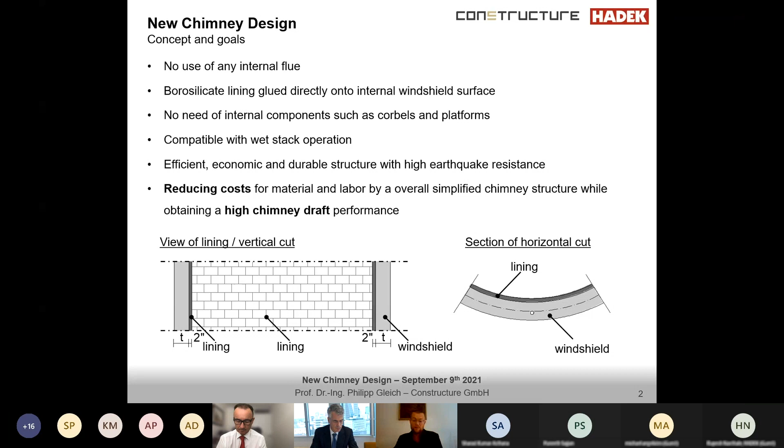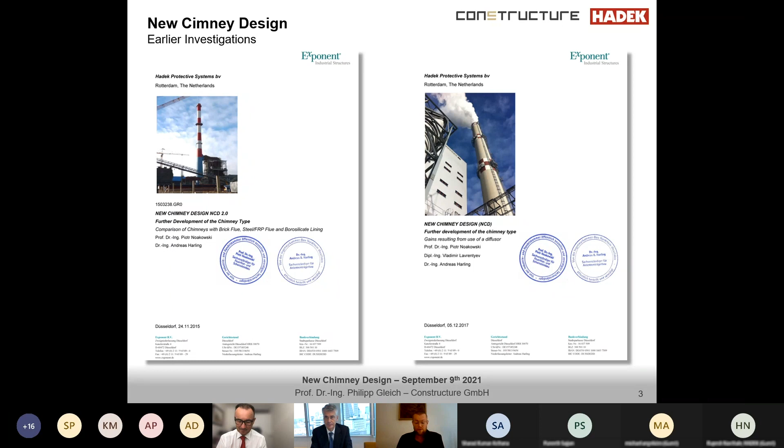I want to present some studies we have been undertaking at Constructure, which was formerly entitled Exponent. Those studies are helpful to understand the benefits of NCD better, I hope. You can also receive those studies, which I will be presenting later, from HADEK or from Constructure on request if you want. As part of one study, we compared several concrete chimney designs, such as the classical brick flue, which is a little bit outdated because it's not wet stack compatible, and the type 2, the steel FRP flue, and the new chimney design. Due to the limited time, I will just be talking about steel FRP flues compared to the new chimney design.

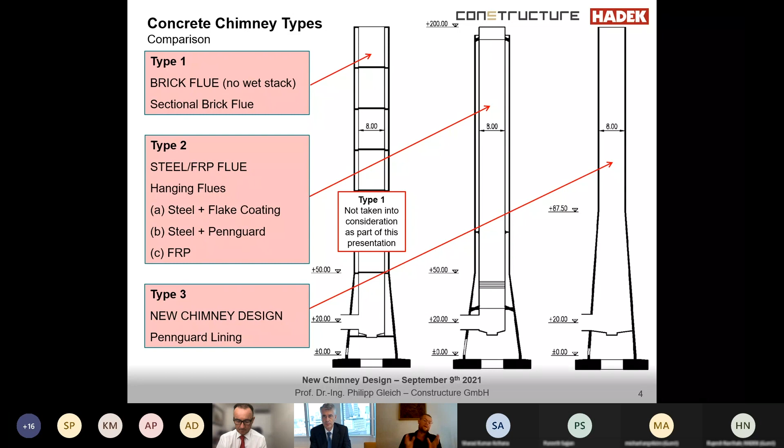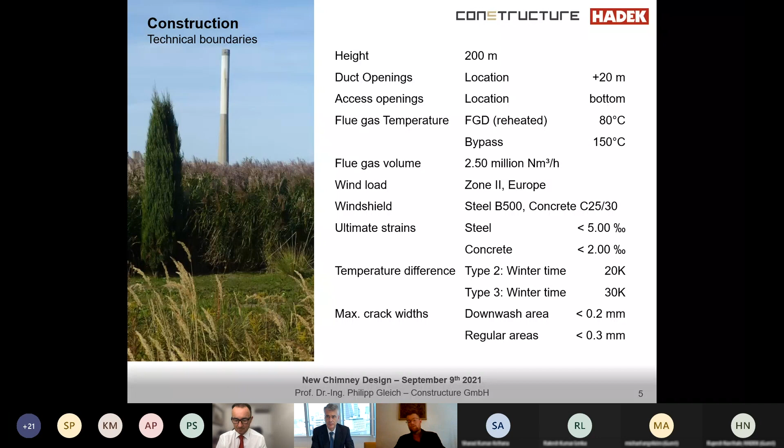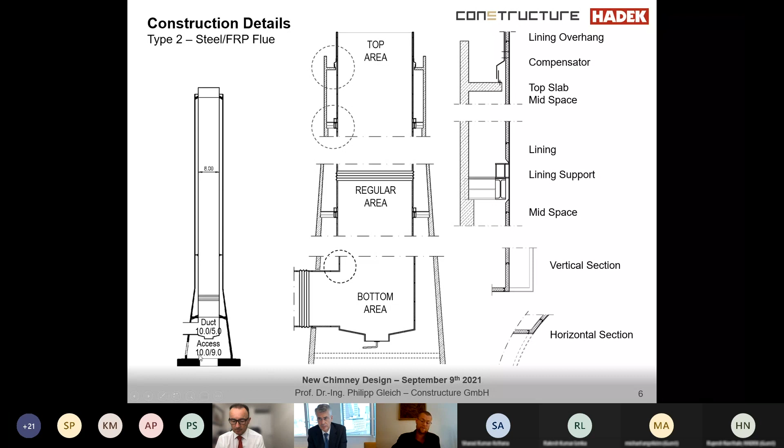Here on this sheet, you just see some important construction details of the chimney type 2, the steel FRP flue. So you have all those internal components, such as the lining support, the lining, which is like glued or whatever to the flue itself. You have the compensators, and all those internal parts, of course, are quite costly to install, and you need quite a big effort to bring in the flues into the chimney. And you can arrange that only by that very large access opening at the very bottom of the chimney. So you need a very large access opening, therefore you have a very large, wide chimney at the bottom.

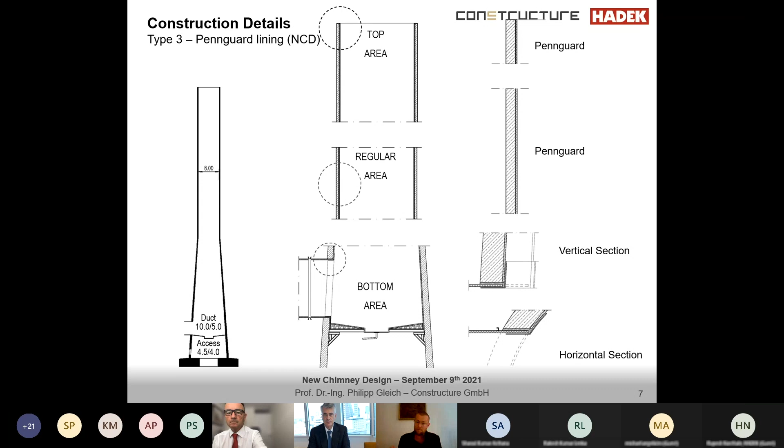But the problem is that you get the temperature much closer to the windshield, and therefore you need to be very careful when it comes to a proper design.

I don't want to bother you too long with theoretical stuff, but let me show 2 or 3 sheets regarding the way we are working, considering the nonlinear behavior of concrete, the cracking and material properties, and also the deformations when it comes to the vertical load-bearing behavior.

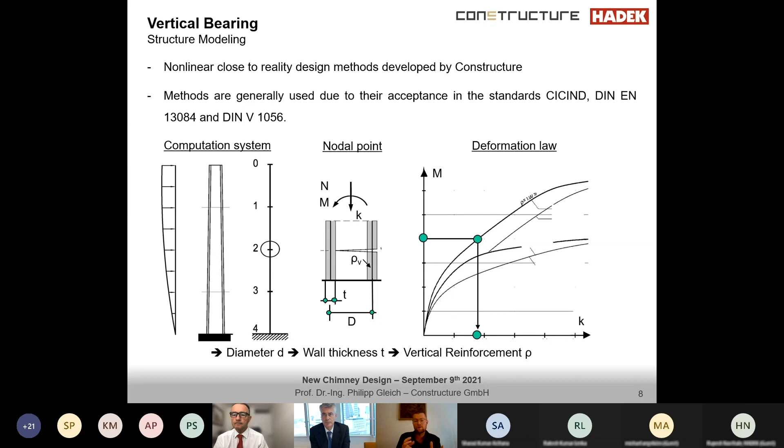To achieve that, this is the way we do it. We have our own system and programs we produce, comparing the actions to the reactions in an iterative process, which is very handy to understand.

As a result, you get the strains in the steel and the strains in the concrete, and you can compare these strains to the limit strains you applied, like 2 per mil for the concrete, 5 per mil for the reinforcement. If there are too high strains, you need to start the process again, make the diameter a little bigger, add some reinforcement, whatsoever.

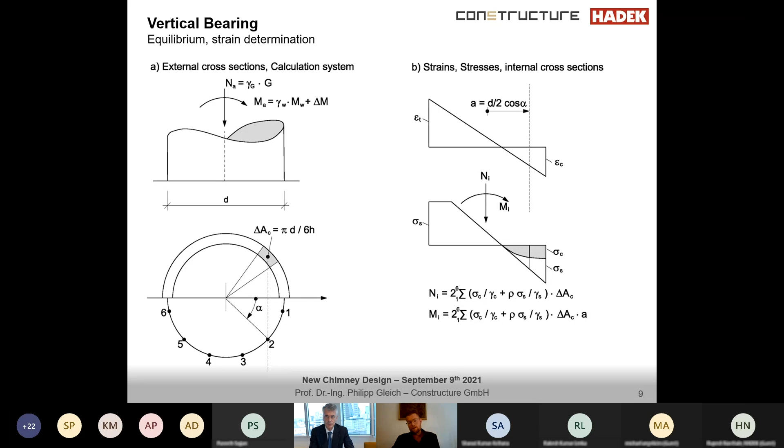From the strains you obtain, you get the curvature, the rotation, the deflection, and last but not least, the second order moment, which you apply again to the moment, and then you start all over again.

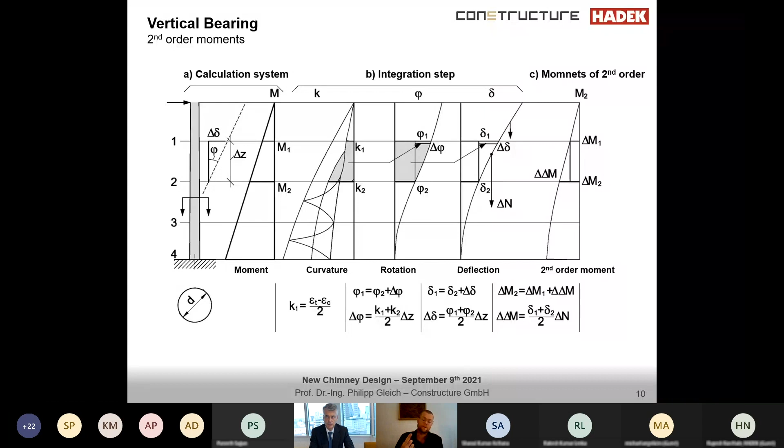So this is the way we are designing the chimneys. Just to present some results of the steel FRP flue, and the next sheet would be the regular Pennguard lining chimney. You see in this case you have a quite big chimney.

You need a large chimney because we have a flue of 8 meters, so we need a lot of space for the chimney itself. Therefore you have a quite wide construction, which is only partly used - the utilization is quite high from the middle of the chimney rising, but the very top half of the chimney is more or less very unused when it comes to the strains of the material.

Due to the large opening, we need to reinforce the flue parts, and we get a very high reinforcement concentration in this area. So you need to design this area very carefully, and nevertheless, it's a very low utilization of the material.

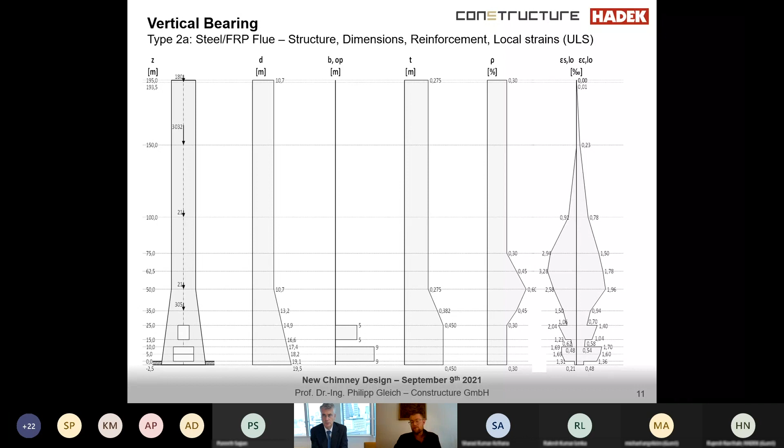Comparing this type 2 chimney to the type 3 chimney, the NCD chimney, you see you get a much more slender structure, a smaller diameter, a wind shell which will increase a little bit in certain areas, and we add some reinforcement where we need it, getting a system which is quite well utilized - a more economic structure, you can say.

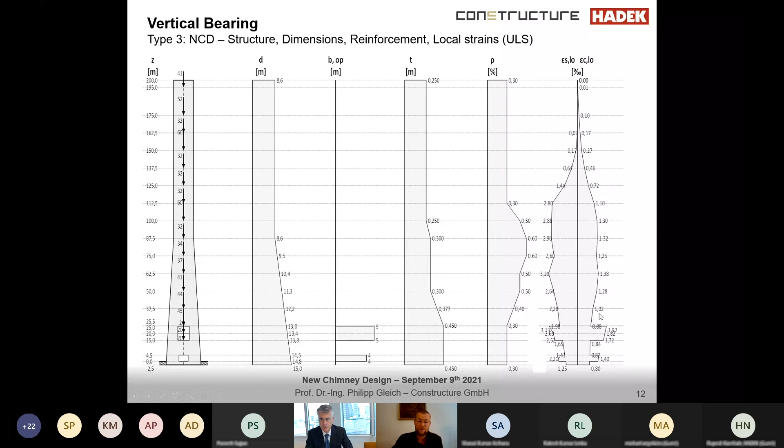Also in the bottom area, you need to do a proper design. You have lots of reinforcement in that area, additional reinforcement next to the opening, so this area needs to be designed very carefully.

Now you see the comparison of both structures. The NCD is obviously proven to need less concrete. If you consider we need, let's say, 1,900 cubic meters of concrete for the type 3, you would need approximately 20% more for the type 2 chimney.

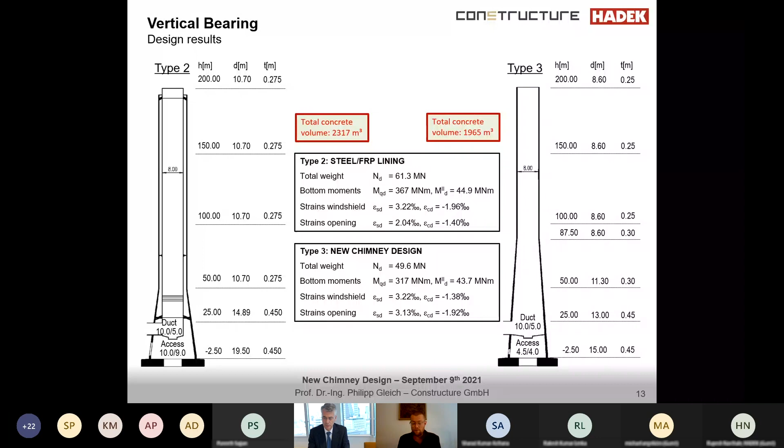So the chimney without an additional steel or FRP flue gives us a quite lightweight structure, which might be very helpful when it comes to earthquake design, but it might be a bit problematic when it comes to the design of the foundation, because you need to prevent the chimney from falling over, and also the deflection, because you have a more slender structure.

But it's not only the vertical reinforcement which is very important for the design process, but also the horizontal reinforcement. I would say that crack calculation is definitely the major problem of all concrete structures here in Germany, and maybe the biggest problem of all concrete structures in the world.

You need to do a realistic estimation of the loadings in order to get a realistic estimation of your crack width. If you're not able to estimate your loadings correctly, you might not only get durability problems, but you might also get serious safety problems regarding the structural integrity of the chimney.

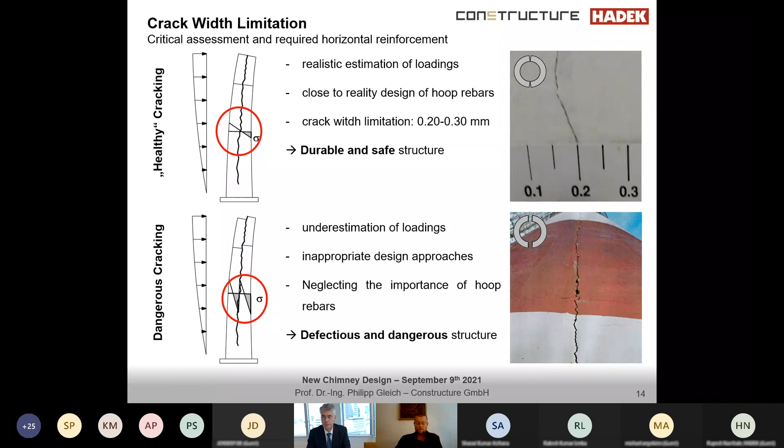So how are we designing the horizontal reinforcement? Again, we are considering the nonlinear behavior of concrete, so the cracking is taken into account close to reality, and from that we achieve quite economical results. If you're just doing a linear calculation, it will lead to either too much or not enough reinforcement, which might or will lead to durability problems or safety problems again.

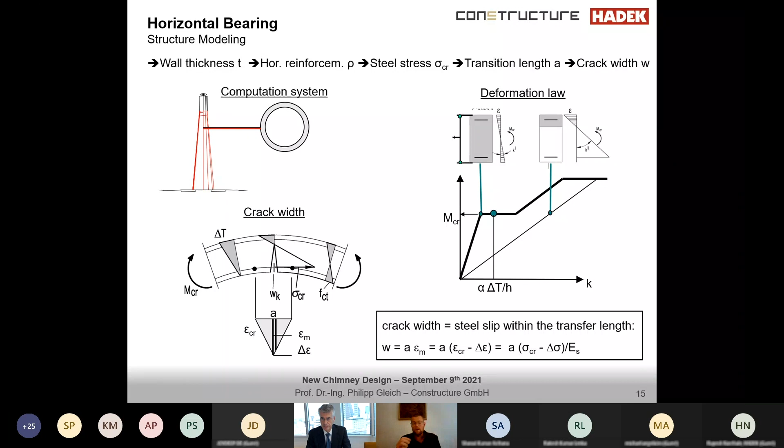Regarding the new chimney design, the most interesting aspect is to estimate the temperature in the concrete close to reality, because this is your main action.

In the following two sheets, I'm presenting some design results regarding the horizontal design. You see the structure to the left, the wall thickness, the reinforcement ratio, the steel stresses, and the crack width.

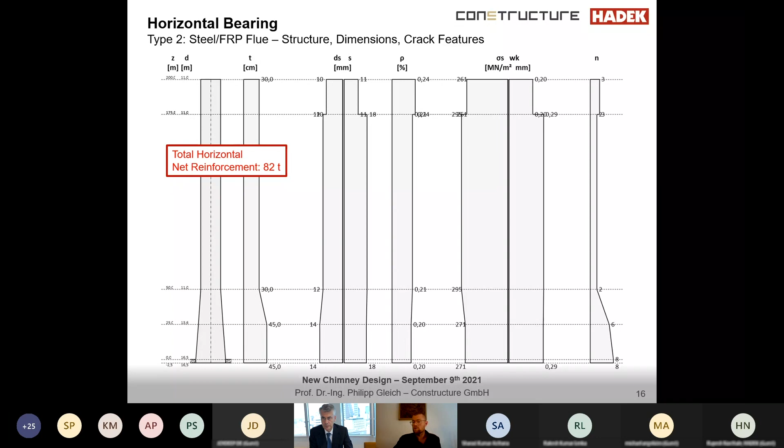We have limited the crack width in the top area due to the downwash effect. We don't want any large cracks there, but we allowed somewhat larger cracks up to 0.3 millimeters going down from the downwash area. You can see it's easily possible to find a proper design if you use the proper design approaches.

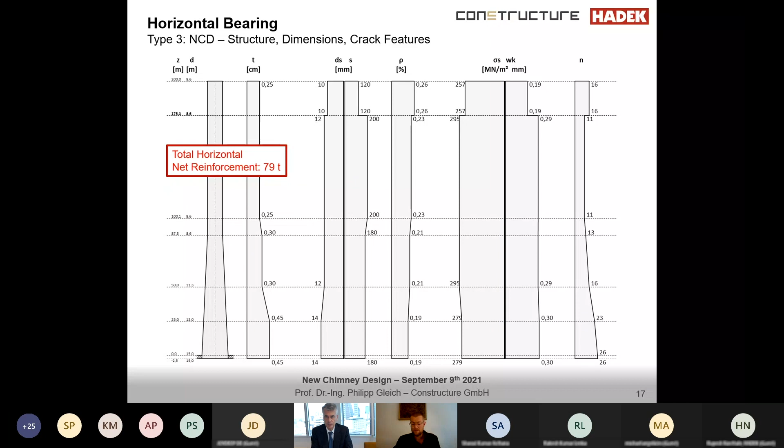When you look at the steel strains, you need to consider that temperature is your main impact. If you're not taking into account the full nonlinear behavior of concrete, you will get false constructions and design results. As I said before, the NCD is quite a lightweight structure.

As a result, we need a heavy foundation to keep it from falling over, basically. Of course, it's not needed at the type 2 steel FRP flues. We have a very large chimney at the very bottom due to the necessity of a large opening for those flue parts.

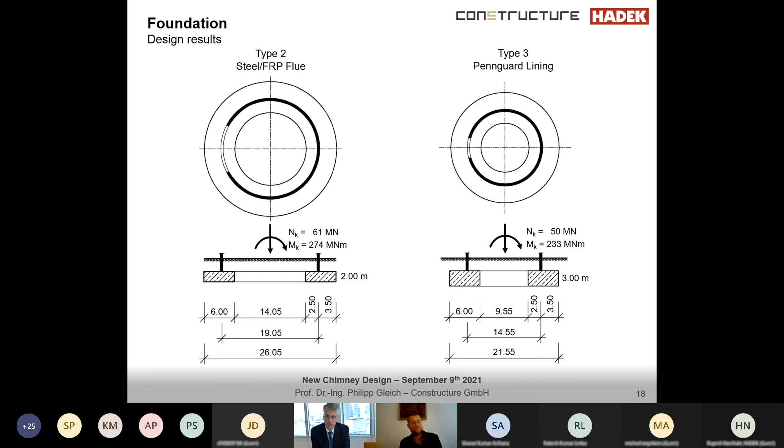But those foundations of the NCD design in general are a little smaller compared to the steel FRP flues, which is very helpful if you have only limited space. So where a steel FRP chimney might not fit in, you might have a chance with an NCD chimney.

Apart from these structural design aspects, I want to show you some more studies we had undertaken. So I will leave those two chimney comparisons behind, and we will talk a little bit more about the draft performance of chimneys.

We were asked once to compare two chimney types. Type A is an NCD chimney, 110 meters high, reasonable diameter of 7.7 meters, with a thickness of 45 centimeters at the bottom and 30 centimeters at the top. We needed to compare this type A to another type B, which was a little higher, 120 meters, 8 meter diameter at the top, and as it is a conical design, a diameter of 14 meters at the bottom.

We were analyzing the flue gas pressure and flue gas velocity. By the way, it was not me - I'm rather a concrete guy, but colleagues of mine are very familiar with flue gas estimations and calculations.

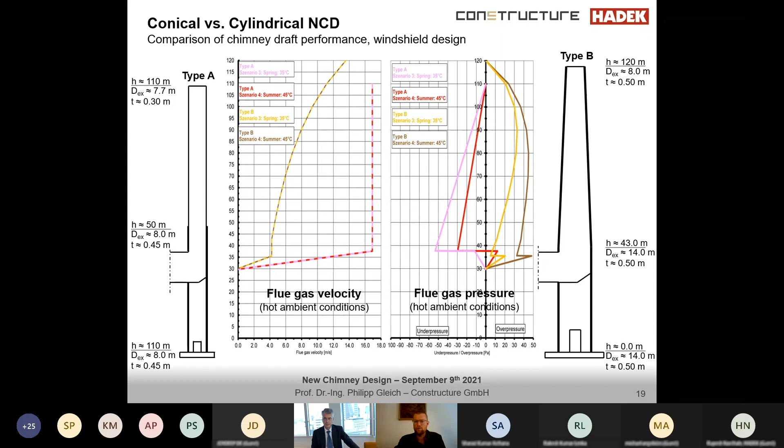We estimated the flue gas pressure, and it was interesting to see that the type B chimney has a very huge overpressure at almost every elevation in hot summer and spring time, and it was basically the same in winter compared to the NCD chimney. Those lines, red and pink, show that you get at almost every elevation a significant underpressure. So the conical design has a very poor performance compared to the cylindrical windshield design in this case.

And it was not only the performance which was poor - if you have such a poor performance, you always need more electricity for an extra booster fan. We had in the type A chimney a much lower concrete consumption, a much easier consistent reinforcement arrangement, and a very simple windshield construction.

It is much easier to erect a cylindrical windshield like type A compared to type B, and you generally get a very good concrete surface quality building a chimney type A. Of course, type A needs high reinforcement ratios at the bottom, but nevertheless the gains from type A compared to type B are always dominating.

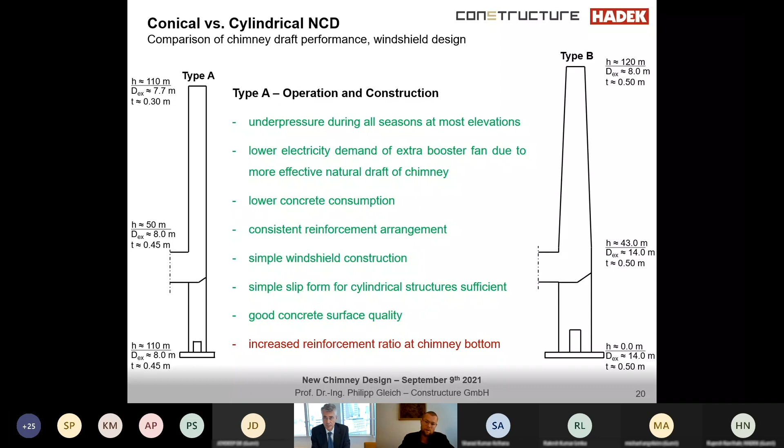We always try to build a cylindrical windshield, at least in the area where the flues are. You see here to the left, a chimney 95 meters high, a little more than 5 meters in diameter. This chimney had been built in Chile, and you will get more information about this chimney in two weeks, I guess.

You see it is a very slender design. It has a wall thickness of 22.5 centimeters at the top, rising up to 35 centimeters at the bottom, but it's a cylindrical, simple design. You can also arrange a cylindrical design up to 120, 140 meters without any problems.

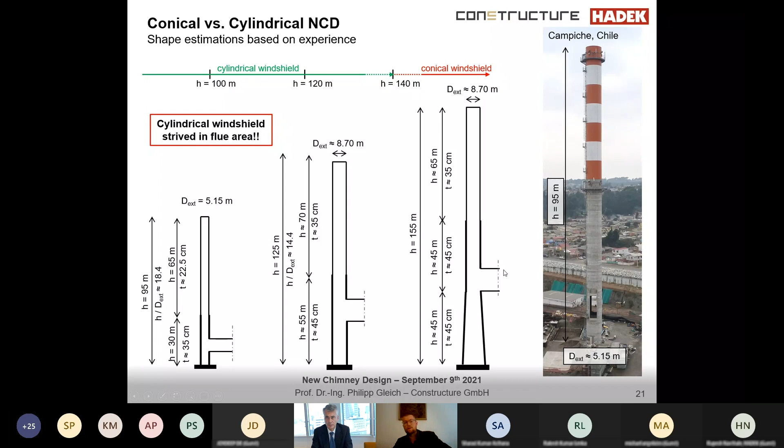If you are exceeding maybe 140, 150 meters high for the chimney, you will start to build a rather conical chimney. But we try to build the conical part only below the duct entrance. In that case, we don't have a pressure loss in the flue gases, since we have a cylindrical design from the duct opening upwards. This is very important from my point of view, to keep a very straight and cylindrical design from the point of entry of the duct.

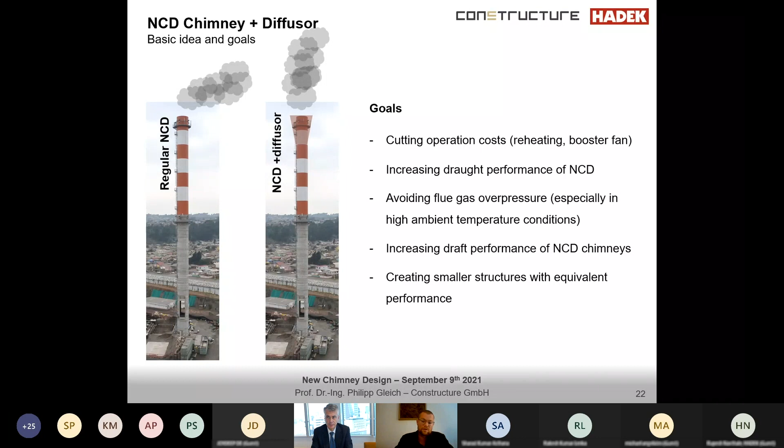Me and my colleagues did studies regarding an additional diffuser which might be applied to an NCD chimney. Like a diffuser, it's very common on steel chimneys, but it's not common on concrete chimneys. The idea was to cut operation costs, increase performance, and avoid overpressure, especially in ambient conditions with high temperatures. It will increase the overall performance of an NCD chimney.

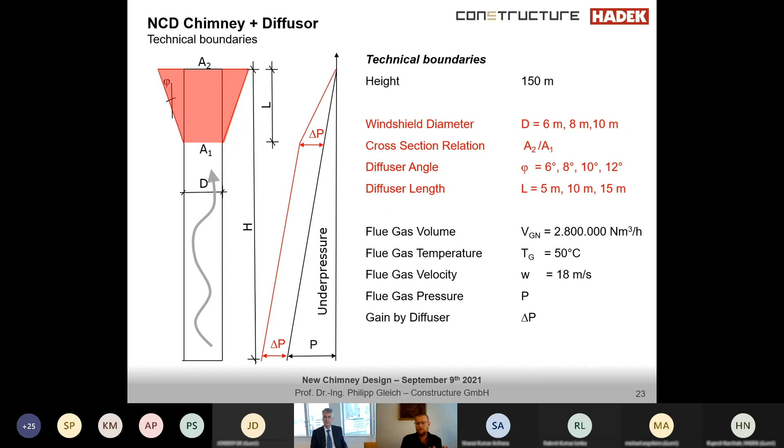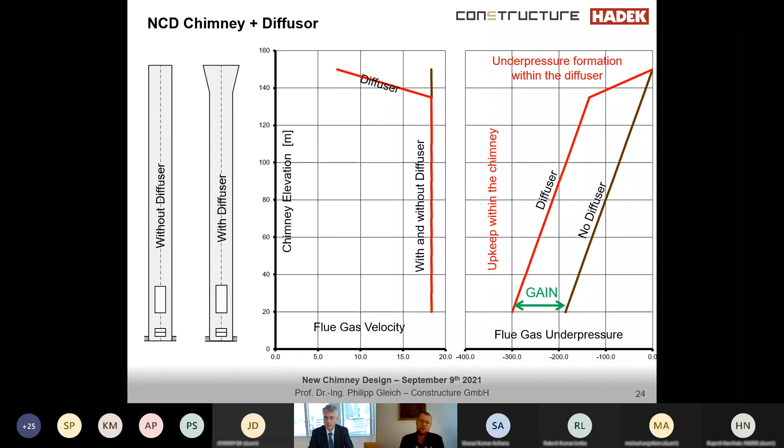Therefore we did some analysis. We were analyzing the effect of the windshield diameter, the diffuser angle, and diffuser length on the gain you can obtain from the diffuser. Those results are very promising. If you have, let's say, two chimneys, one without a diffuser and one with a diffuser, you get a strong gain from the diffuser, always depending on its very shape. This study proved that adding a diffuser to the top of a chimney might be a very interesting, good measure to increase the performance of the chimney.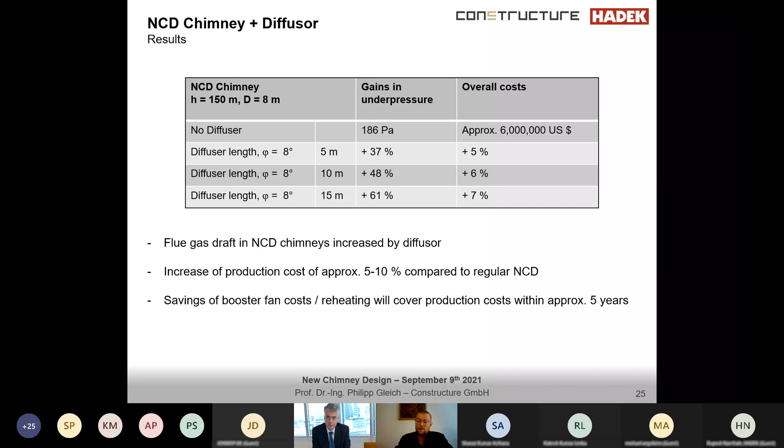If you increase the performance of the chimney, you will of course save electricity for your booster fans. We analyzed that the production cost of a regular chimney would be approximately 6 million US for a chimney 150 meters high with a diameter of 8 meters. Calculating the extra effort to build a diffuser on the very top, it is between 5 and 10% compared to the overall cost of the chimney. The savings from booster fan costs due to the better performance of the chimney will cover the production costs within approximately 5 years.

It is always quite tricky to design NCD chimneys. If you are considering a regular steel FRP flue, you have your requirements from the windshield design, such as the load-bearing behavior, ultimate limit state, and serviceability limit state. You have general construction rules whatsoever. And then, of course, you have the requirements from national standards, especially loadings. But you can calculate the windshield itself rather separately from the requirements regarding the flue design.

This is different when you come to the NCD, because you first do the flue design, considering your gas volume, flue gas velocity, and so on, in order to determine the chimney cross-section which you really need. Then you have to find a way to combine that cross-section with your load-bearing behavior or with your design of the chimney. And that makes it a lot more difficult.

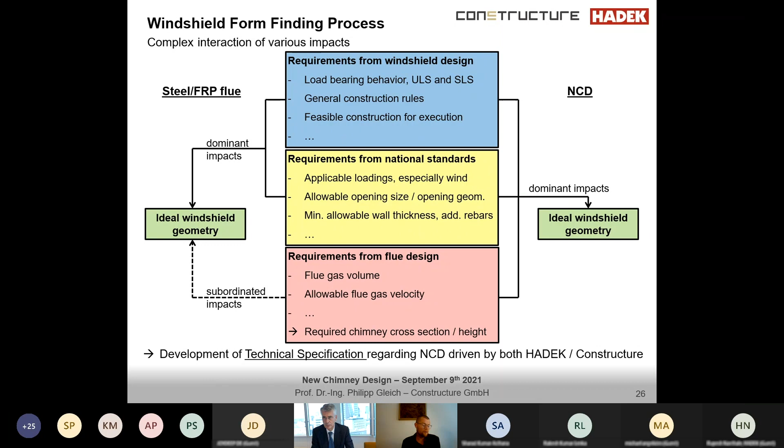Another challenge is that sometimes chimney rules and regulations are based on classical chimney types, such as FRP flue chimneys or brick flue chimneys. So the NCD chimney has not yet arrived in all those rules and codes, and therefore we are hopefully trying to develop a technical specification for such NCDs soon.

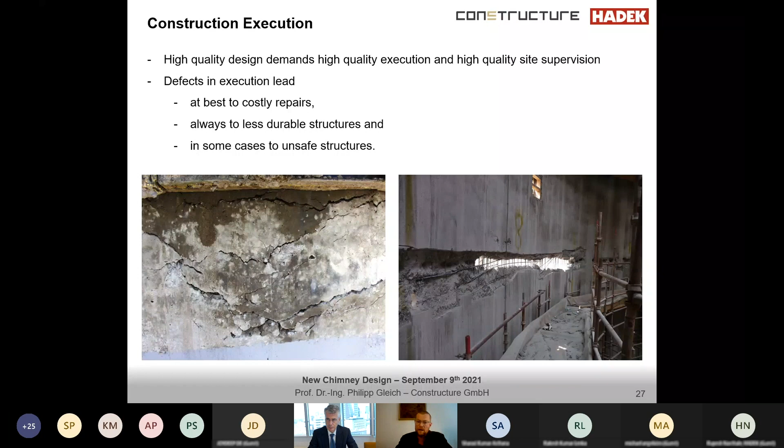I was just talking about the design demand, and what is equally important to me is the high quality of the execution and the high quality of the site supervision. I'm sure everybody has hundreds of pictures of chimney construction sites, and we all know what's happening on those sites. Such poor quality would not fit with a very elevated, high quality design of an NCD chimney. So you have to be very careful when it comes to execution and site supervision again.